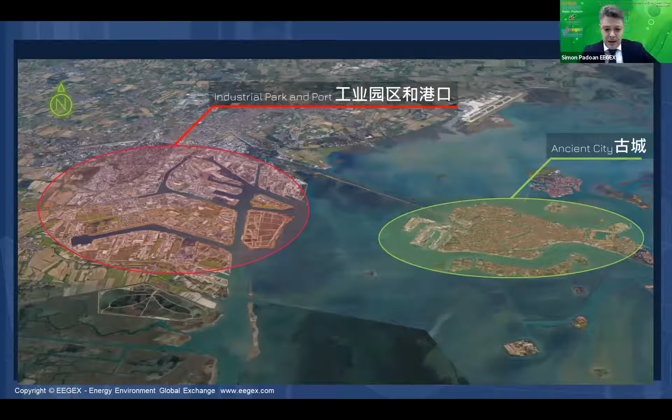And this park has been built in 1919, and it was actually very developed after the Second World War. And at the end of the 70s, it was one of the largest petrochemical areas in Europe. And it was also called the capital of polymers, because this is actually an industrial park for production of fibers and related chemicals. It was also another base for industry of iron smelting and laminating, and also for aluminium.

So it was extremely polluting, and it was polluting before any kind of environmental law in Italy. The first comprehensive environmental law was in 1997, and the second revision was in 2006. So the point is that after the 70s, after the first half of the 80s, the chemical world changed, and also the cost for energy in Italy was, and it is, one of the highest in the world.

So many companies left the park, and the park was almost completely abandoned, and we had a huge problem. Over-contaminated site, with no economy, no money to do environmental restoration, and a very, very delicate environment. So what to do in this urban area, what to do to restore the environment, and what to do to actually attract investment in this area.

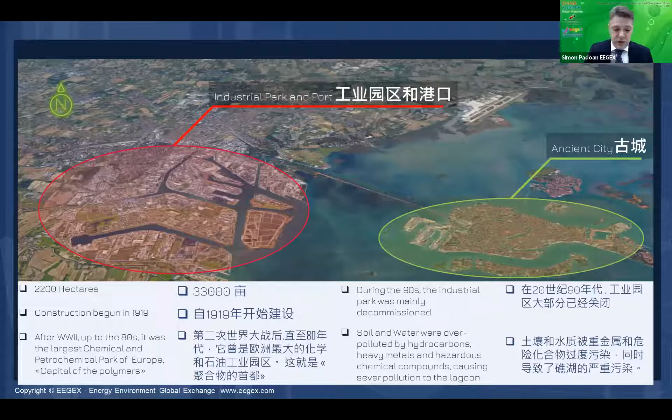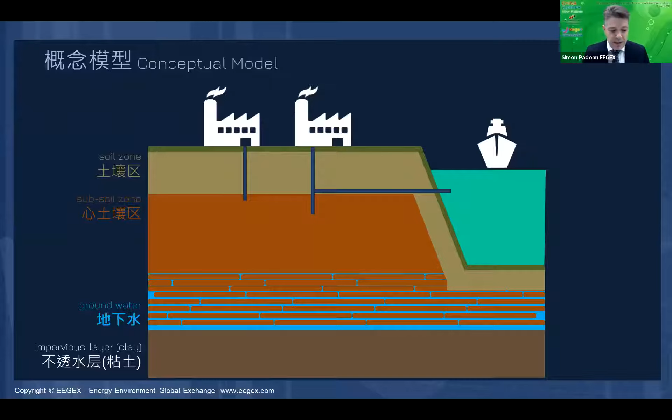And the main problem related to sponge cities, which is a problem for us also, of course, is when you face the problem of how to deal with the soil remediation, and this is a very simplified conceptual model. You can see the factories on top. You can see the different layers, so the soil, the subsoil. On the bottom, you also have the impervious layer and the groundwater that is accumulating over the impervious layer.

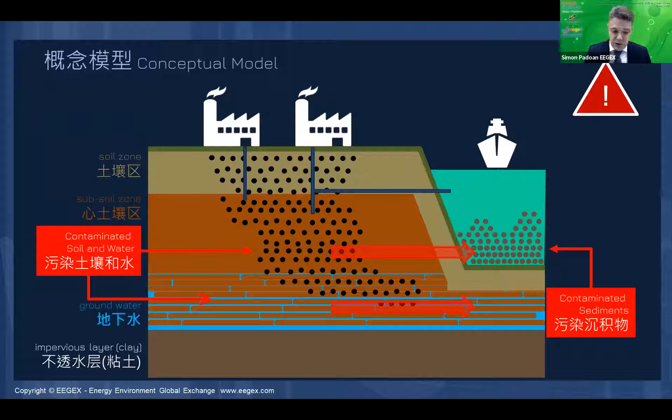The first thing that you have to do is stop the flow of contamination that runs with the water. The problem is that over time, the contamination comes down to the soil, to the subsoil, and when it encounters the water, that's the real problem, because the water transports the contamination to other places. So it is not only a polluted area, but it is also a polluting area. So you have to stop the flow, putting down the walls attached to the impervious layer, and in this way you stop the flow of the water.

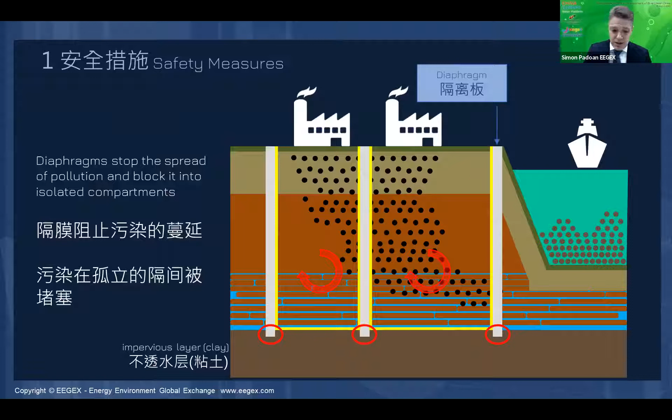And of course, this is a safety measure because in this way you stop the pollution from spreading, but at the same time you have a huge problem with water management. On one side you have very important improvement in the surface water, and you can see here two pictures before and after the intervention of the safety measure. You can see how the natural color of the water has been restored after the works, and you can also see the pile walls that have been established between the ground and the water.

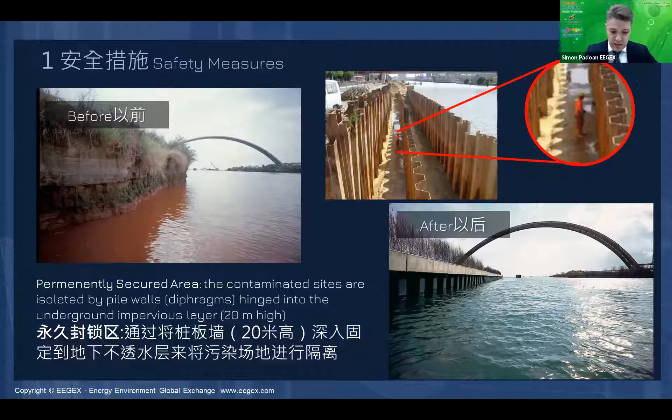But also you have problems related to, for example, flooding and rainwater. In 2007, we had a major flooding on the mainland. Venice is usually famous for the high water, and high water is when you have the flooding of the ancient city, but that is not related to rainwater; it is related to strong wind blowing from the south and pushing the sea inside the lagoon.

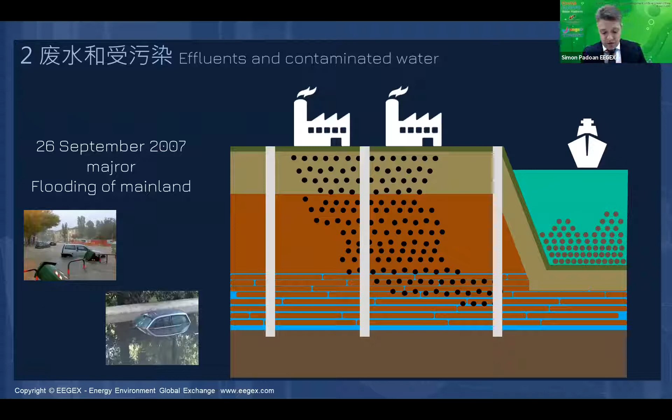So it affects the lagoon, it affects the ancient city, but it never affects the mainland. In this situation in 2007, we had a major flooding. It was 300 millimeters of rain in a couple of hours. And the main problem is that the water was not flowing away. So we had the flooding in the mainland. So we understood that we had to do something very quickly.

And the point is that we have to take the water, and we decided to do an integrated system to deal with different issues at the same time: how to deal with the contaminated underground water, how to deal with the effluents and the wastewater of the factories, and how to deal with the stormwater and the rainwater.

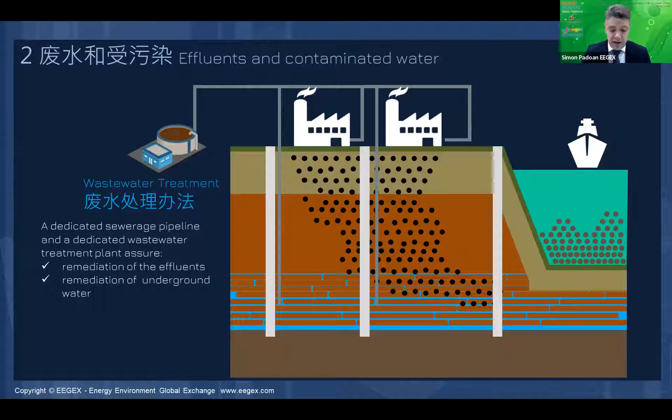So the first stage was to establish the backbone of a pipeline to take the water from the factories, to take the water from the contaminated underground and to take the rainfall water. And we brought that to an integrated wastewater treatment plant. And the point is that this plant is also designed to clean the water and reuse the water.

We pump back the water to the factories, for example, for cooling systems, but also for industrial processes. So in this way, we loop the water, and we don't take any more fresh water from the environment for industrial uses. But at the same time, we can regulate the flow of the water inside the industrial park, and that also positively affects the whole urban area.

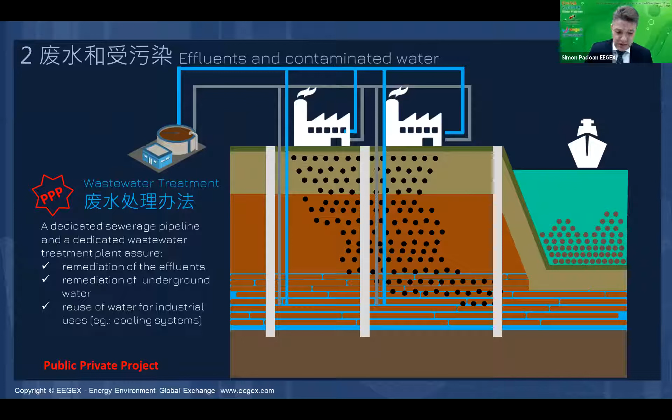This system, it was not easy to understand how to do the system, how to do the economics of the system, how to do the financials of the system. It took a lot of time, a lot of negotiations, but now it is working. It is a treatment facility of 160,000 cubic meters per day, and more than 1/3 is related to municipal wastewater, and the remaining part is industrial wastewater and rainwater. It took an investment of almost 200 million euros, and it is a private-public partnership.

The investment capital is fully private, with public warranties of minimum turnover per each year. But actually, the annual turnover is around 22 million euros. The operating costs are 19 million euros or so. It has its own economic sustainability. And all the factories have to deliver the effluent as is. They don't have to do pretreatment because everything is dealt with inside the treatment plant. This is also very important for the factories because in this way they pay less for environmental protection.

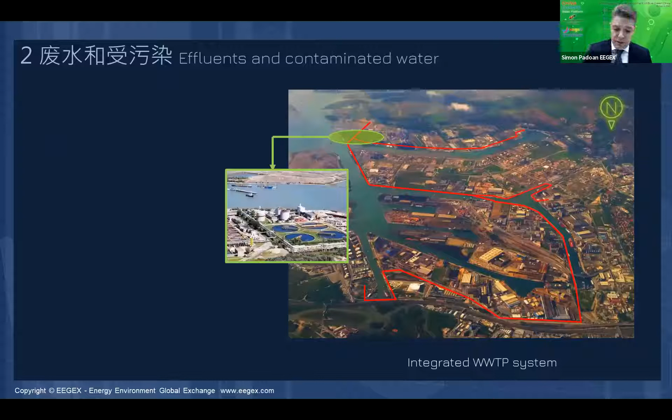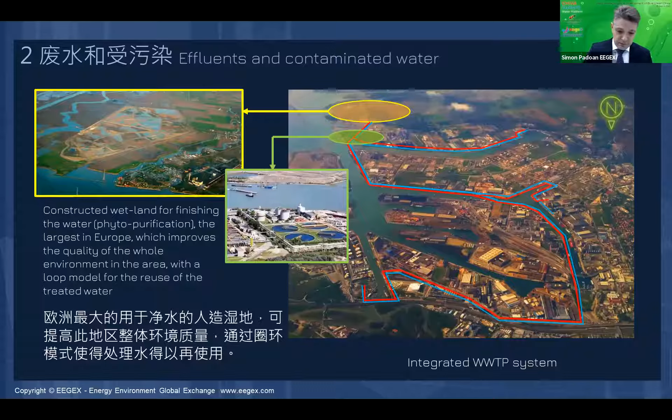Here you can see the picture of the industrial park with the backbone for the sewerage system. And this is the backbone that brings back the clean water to the factories. On the left side, you can see also the finishing section of the treatment plant. It is a very large constructed wetland. It is meant to do not only the finishing of the water, but also balancing the quality of the water in the lagoon. So after that, you can actually deal with the soil remediation, and all the planning of the city with each section and each lot of the area.

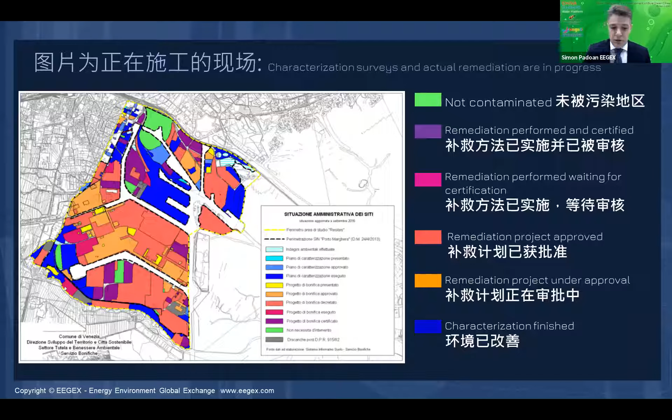We know everything that is happening, from the detailed surveying to the actual works for the remediation. And these are the pictures of some of the works. So this is the experience of Venice. Thank you for your attention.

Thank you very much, Simon. I could imagine that you could have given us a presentation lasting for quite a long time with such a huge area to be covered. Thanks for this presentation, which gave us the dimensions of scale of areas and also of when climate change adaptation has to be taken into account, or remediation problems get solved in advance.

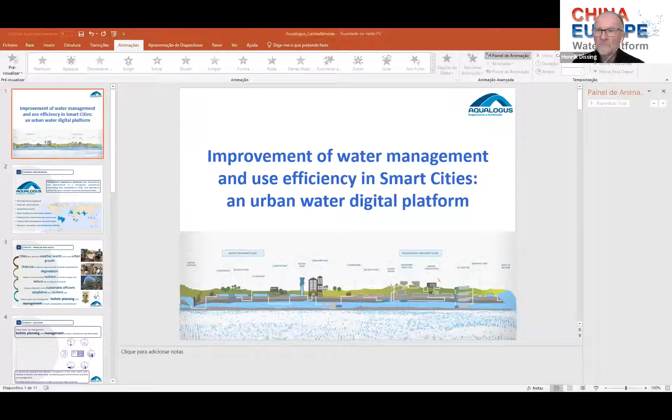We will move on to our next speaker, Carina Almeida. Are you ready? Excellent, Carina. Thank you. Carina, we can't hear you.

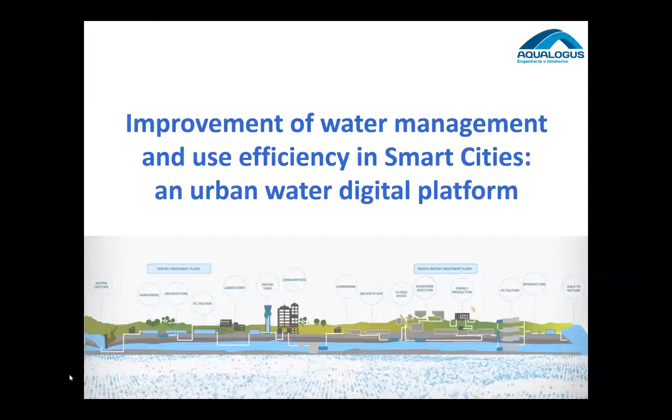Can you hear me now? Yes, we can hear you now. I have to change my micro. Sorry for that. Okay.

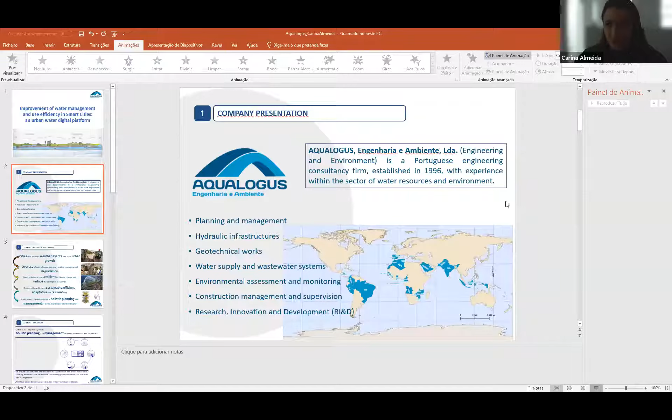My name is Carina Almeida. I came from Aqualogus company. Aqualogus is the Portuguese engineering consultancy firm since '96, with experience in water resources and environment in Portugal and in more than 20 countries around the world. Hope in the near future China will be at this our map in a blue color.

So the company embraces many different fields of activity: water supply and wastewater systems, environmental assessment and monitoring, construction management and supervision, or research, innovation and development. So focus on the problem and the needs. It is well known that we will face extreme weather events, especially in the urban areas and with the rapid urban growth. So this led to an overuse of natural resources, creating environmental degradation.

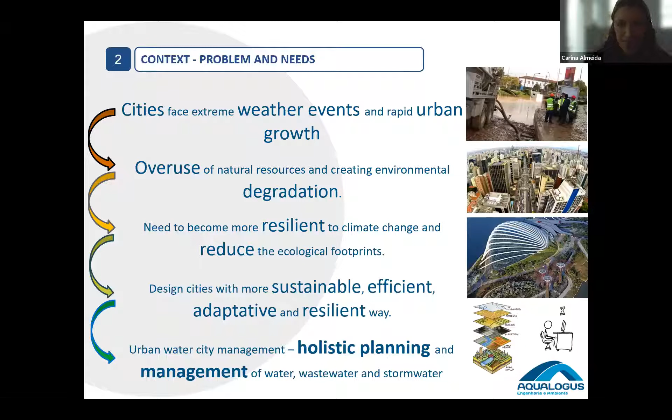So our cities need to be designed with a more sustainable, efficient, adaptive and resilient approach. So this can only be done adopting a holistic planning and management, as all of you already know. And ideally, we should plan this first sitting at our computers, because nowadays we all have know-how and all this development in terms of technological tools. That's why we are here today, talking with each other all around the world.

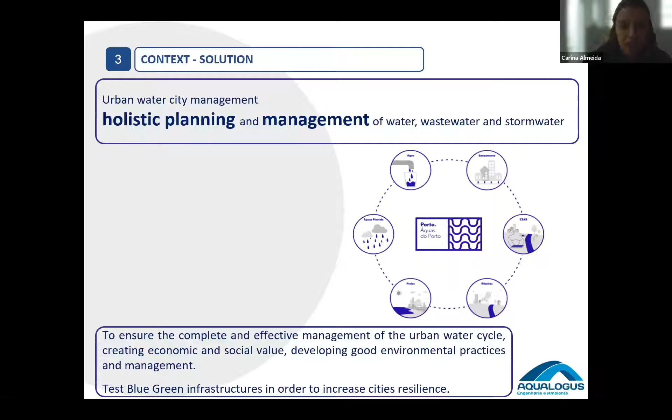So taking the approach of this last statement in terms of holistic planning and management, Aqualogus developed several projects that integrate a vast number of variables and actors of the water cycle. So Aqualogus focuses on solutions for the development of complex technological platforms, which could integrate different software systems, different types of available information, and the ability to simulate climate conditions in short and long terms, present, past, and future climate conditions, flooded areas, water quality and quantity, soil infiltration.

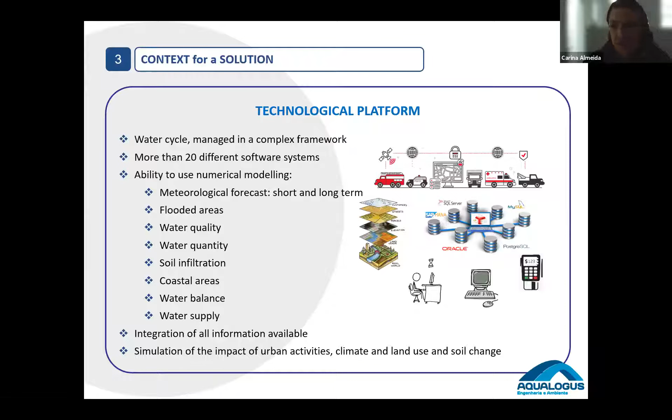This is extremely important when we talk about the sponge capability of our cities, coastal areas, among others. So mainly the possibility to simulate and test the impacts of urban activities, the climate, and land use or soil changes. So I'll present you here the H2 Porto platform. This platform was a result of a joint venture led by Aqualogus, focused on the monitoring and control of the urban water cycle, and integrates all information in order to anticipate floods, pollution events, etc., using mainly the numerical modeling approach.

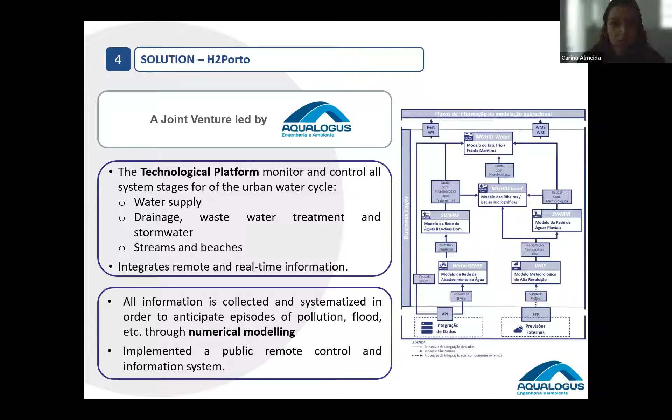So it integrates several types of models to simulate all the urban water cycle in the Porto city. Here are some examples of the screens that we can see in the H2 Porto platform. Here in the upper right image, we can see an example of the water balance for the water supply in the city. Then here we have the water balance for the wastewater system. So here in Porto in January, this is the water balance on a monthly basis. We can see that 100% of the water from the wastewater system was treated. And then here we can see the water flow in the water supply system.

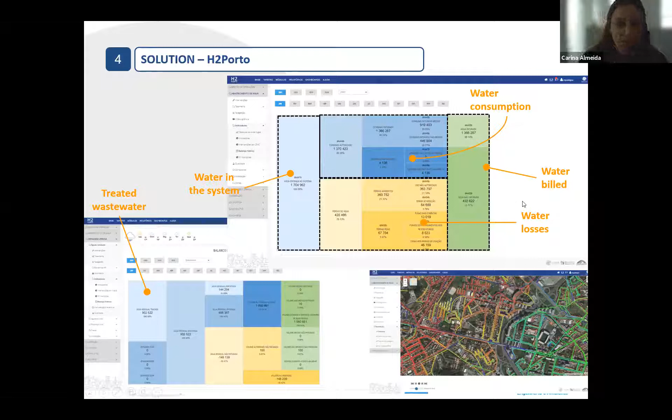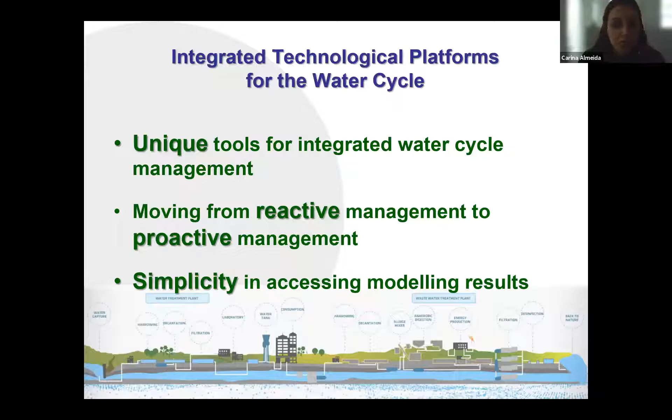So to conclude this short presentation, Aqualogus aims to apply unique tools for integrated water cycle management, moving from reactive to proactive management, especially due to climate change projections. So we aim to simplify the access to different modeling results in order to adapt cities and increase our resilience.

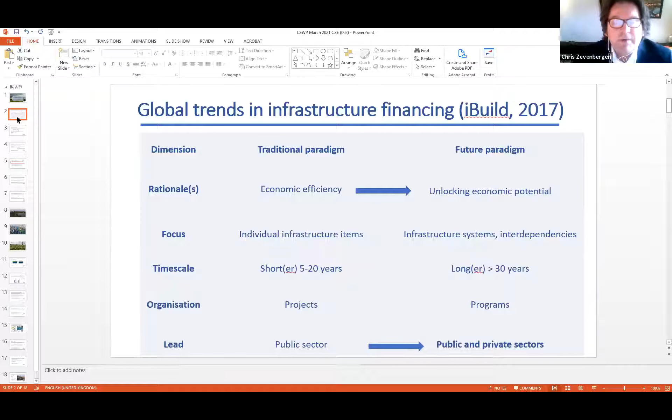So what are public-private partnerships? Why are we inclined to have those? One is that they make projects affordable. Private financing is important and is needed. It also helps to achieve better value for money over the lifetime of the project. We will include the private sector experience and knowledge into our projects. And last but not least, it will better utilize the social and economic benefits of our assets.

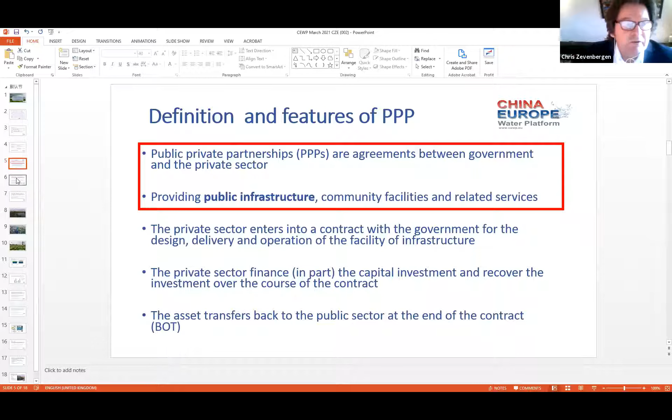Now, what is public-private finance? It has a few features, but the two most important ones are highlighted in that frame: public-private partnerships are agreements between the government and the private sector, and it is mainly about infrastructure, community facilities and related services. So that means sponge city projects are ideal settings for public-private partnerships, in theory. The need for public-private partnerships in sponge city program implementation is there. As I mentioned, there's a huge investment gap.

It has been mentioned by Mr. Chen this morning, also from CAUPD, that financing Sponge City is important. Therefore, public and private finances will be there. But it is more than only attracting additional resources. It's also improving the quality of infrastructure. It is also bringing innovation into those processes. And these innovations are also about green infrastructure.

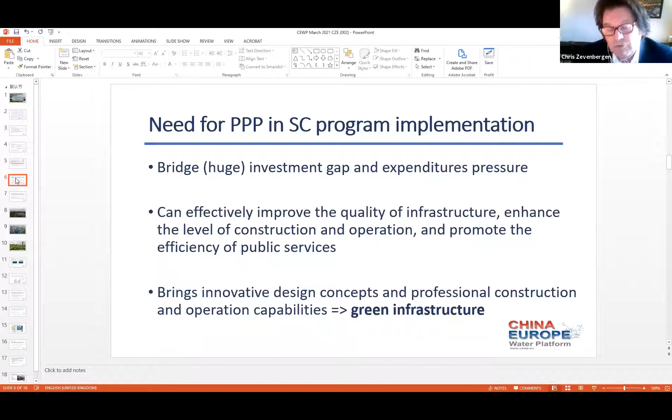And why are these innovations so important? These are important because we are lacking, as Frans van der Ven already mentioned, a lot of knowledge and understanding and clear guidance on how to implement green infrastructure. Now, the private sector is well placed to give a hand there.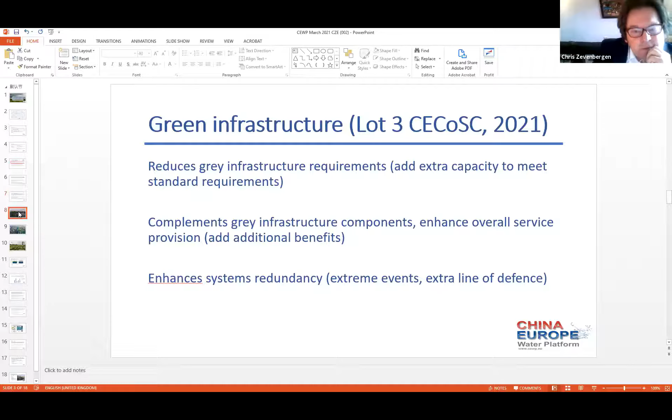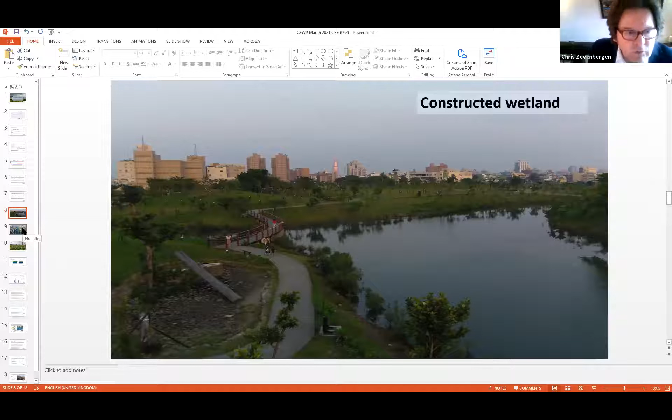Now we see a lot of examples, more and more. This is a typical constructed wetland. You see them in many places in China. And of course, they are to purify water, to store excessive rainfall, but they do much more than that, as mentioned several times. They also lead to the increased value of the properties close to those constructed wetlands. And the question is, of course, who is benefiting from these investments into green infrastructure and who is paying? And you see there's a discrepancy, that those who are benefiting are not paying.

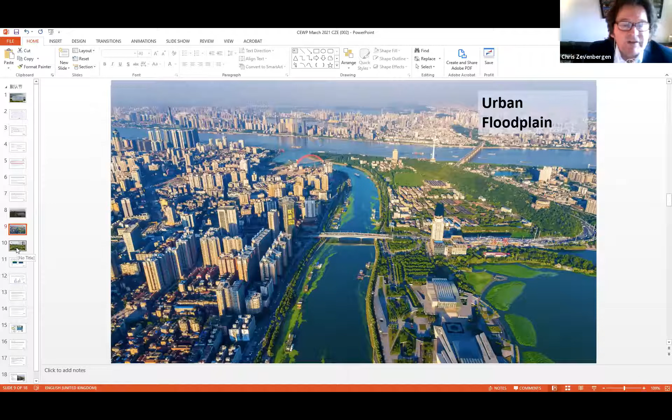Another important function of green infrastructure are those urban floodplains. They are also more and more being installed. And again, the private investments in these areas are, as we see so far, quite limited, although the benefits from these investments are quite significant also for those who are in the private sector.

Now, this is an example of New York, where we see that green infrastructure blending gray systems will lead to a significant reduction of the cost. What you can see here, the 2.9 billion dollars is the investment in the gray systems. And when we want to expand the capacity, which is needed in New York, then there are two options. Either we expand using gray systems, or we expand using green systems.

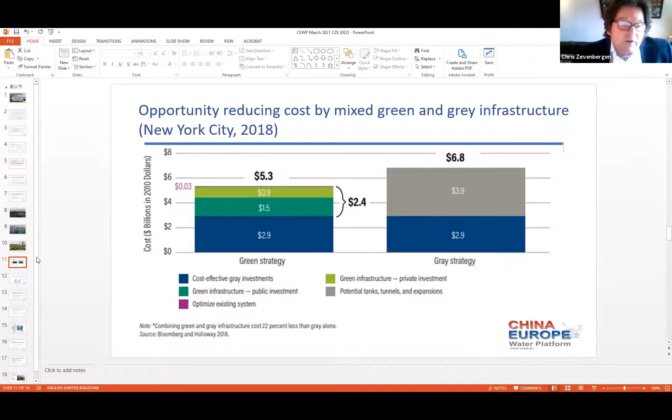And what was the result of this cost-benefit analysis? That those green systems are really less expensive than the gray system. And this offers an opportunity for the private sector to get involved, and that is what New York is currently doing.

Now, what we did in our CECoSC project, we asked our cities, Beijing, Turku, Gothenburg, Copenhagen, Amsterdam, to give a scoring on their experience with public-private financing. And what came out of these interviews, of this scoring, is that our cities have limited experience in public-private partnerships. They see that it is gaining ground, and they see also that they have an increasing ability, but are not there yet, to value green infrastructure, which is considered a critical factor in public-private finance.

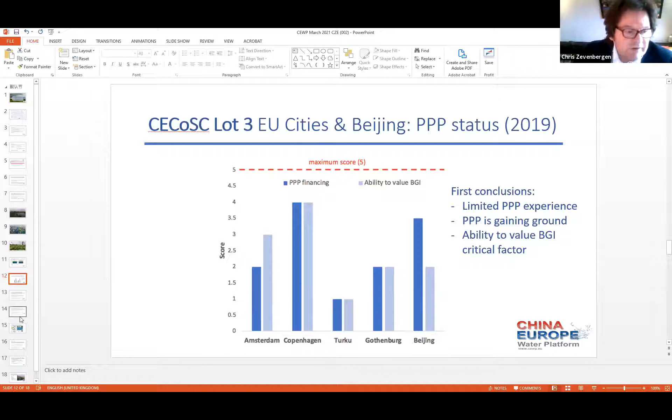Now, what are the lessons we can see so far from the projects in Europe, but also in China? That we need, of course, to develop a business case with a very compelling story, where we have to capture the benefits, also the softer benefits, and that is, of course, a challenge. And in order to do so, we need to engage the stakeholders, as mentioned several times. We have to identify those interests, and we have to align those interests.

But what is also important is that we see other policy domains emerging, like health and biodiversity. Now, these domains should be connected to what we call Sponge City. So the Sponge City objectives need to be expanded and need to be more comprehensive than strictly focusing on the water system. And finally, there is also an opportunity to link carbon neutrality and mobility, which are emerging themes as well, to nature-based solutions.

So there are a lot of, I would say, opportunities. Now, to conclude, we can say that public-private partnerships are gaining ground and are also really needed. Green infrastructure is offering that opportunity. It creates additional benefits, and we have to, of course, value those benefits, which is not easy, but we are making progress. We need to consider the long-term life cycle benefits and synergies of those systems, and therefore we need to include stakeholders in that process.